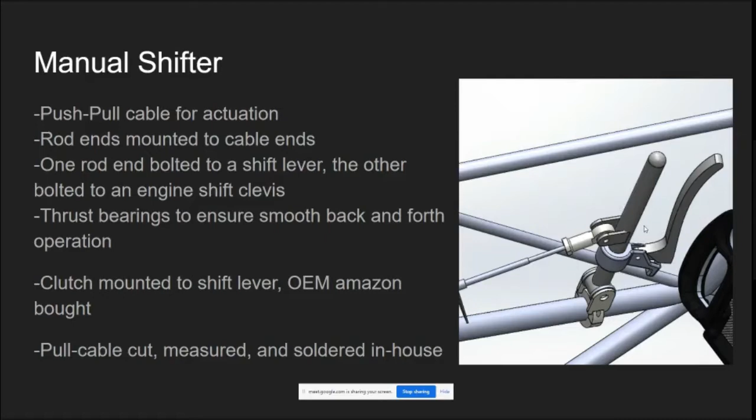This clutch lever was a bolt-on fix from Amazon, for a motorcycle, so it really wasn't a high-cost system itself. However, it was very effective in completing the system and completing its function. All right, next is the pedal box.

I'm going to just touch upon this because I have a capstone from 2018 that is our pedal box that we've grandfathered from 2019 through to 2020. And it's actually a really cool capstone. I encourage you all to read it. I've linked it in the same folder in the member development. I'll show you that later. The actual PDF file is in there. So I highly encourage you to read through it on your own time,

because the process of design is impeccable. It's something not out of just common sense. It's something that they've put thought into quite literally everywhere. So mainly the 3 points I wanted to nail through about the pedal box. It's arguably the most crucial part of this entire control system, because it is the most designed.

And when I say most designed, I mean the most amount of hours of engineering principles, from mechanical advantage all the way up to pedal feel, up to newtons per G of deceleration that you could see from the braking force. Everything from that to the pedal ratio of the throttle and the cam design, which we'll also be going through. I have a list here of documents that we're going to be going through.

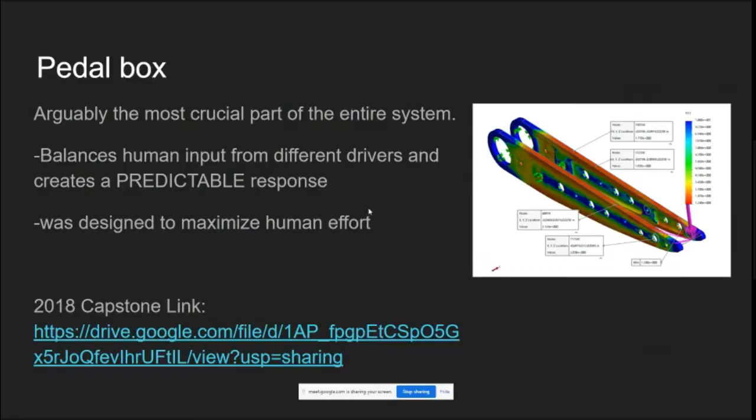Now the pedal faces with side cups, these are actually 3D printed out of a carbon fiber reinforced polymer on a Markforged 3D printer. We'll get more onto that later. It's something that one of our sponsors had done for us. So if you see any of that black material, kind of like the stuff on the RF19 steering wheel, it's a carbon fiber reinforced polymer or reinforced nylon. It's very strong stuff, also very expensive to prototype.

And our sponsor has recently gone out of business. However, we will be printing stuff through the DFZ, Design Fabrication Zone, in the upcoming years for CFRP parts. And those CFRP parts are very versatile, whether you're a CV vehicle or an EV vehicle. These parts need to be prototyped. I'll get onto the accelerator or throttle pedal later, as well as the brake pedal.

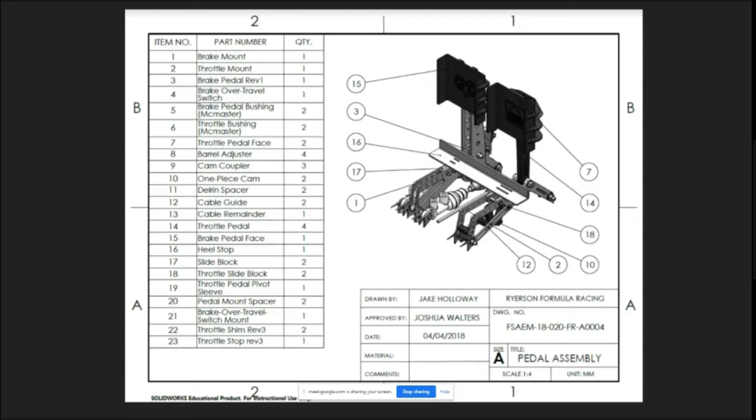But the pedal box was designed to encompass a 4.2 pound weight goal restriction, as well as accommodate the correct pedal throw for the desired newtons per G deceleration, as well as the throttle profiles desired. Next, this is a back view of this.

Now, this is actually something I can touch upon now that you have a picture of it in front of you. If you look right here on the left pedal, I'm not sure if you can see my cursor, but number 23, number 22, that's a throttle stop. Now, they put a throttle stop that would bottom out on the back of the bulkhead, or the anti-intrusion plate, as you would see it.

So on RF19 and RF20, you'll see that that blue cone is glued to the front of that anti-intrusion plate. It's just a small 1/16 inch laser cut steel plate that has been welded to the front of our car, or the front of our bulkhead, and this throttle stop presses on the back of it.

Now, the very unique part about this design is that when you hit the bottom or the throw, or if you hit max throttle on your throttle pedal, max throttle is actually defined by how many shims, or how many inches of travel you have between your pedal face and that anti-intrusion plate in which it hits and bottoms out on.

Now, because the force of your foot on the pedal bottoms out on that face, using the back of the anti-intrusion plate as a structural member to absorb the force of your gas foot, your right foot, you don't need to make a very strong throttle pedal itself. So you'll see that these throttle pedal plates were made originally of aluminum, but we got them reprinted out of CFRP and reinforced with continuous fiber. And we're going to get more onto that later.

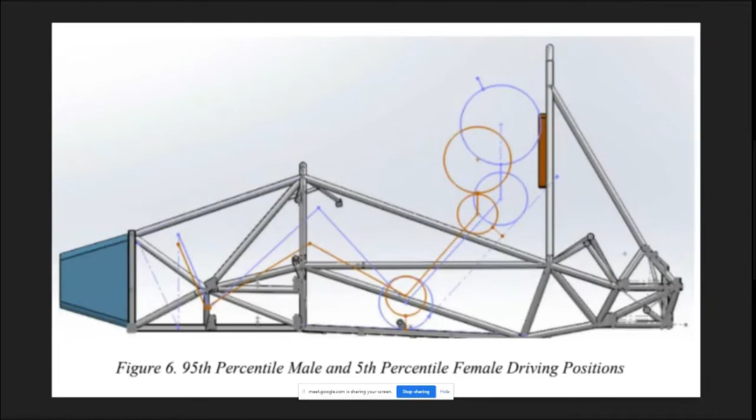Now, this is a picture of RF-18's driving position, where 5th and 95th percentiles were accounted for. Notice that the bottom hip circle, the orange circle indicating the 5th percentile female, would be higher than the 95th percentile. You can actually see there's a little gap right there in the bottom. So the whole point of showing you this picture is that they've put a foam pad underneath the 5th percentile driver to raise them up so that they have a similar eye line to the 95th percentile male. Just a point to nail through.

Now, I hope you guys can see this adequately, and I hope you guys aren't looking through a phone screen, because I can see it through my phone screen. It's not looking too great.

from the point of, you might be able to see it, a small blue line here indicating the driver's femur, another small blue line indicating the driver's tibia and fibula angle, as well as another hidden blue line, which is their ankle angle. The ankle angle would be 90 degrees constrained, so that you're not holding your foot at a 70-degree angle with respect to your tibia and fibula, which would be quite uncomfortable for an endurance race, let alone small operations of the car.

But one thing that you should nail through is that there's a small distance somewhere hidden in here. It's 36.5 inches from the tip of the ankle to the H point. Now, whoever is doing ergo next year, most likely Kyle or Josh.

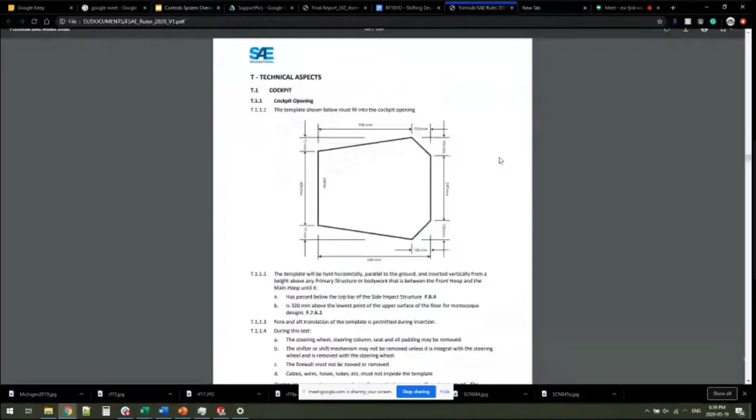And if it hits anything, you do not pass tech. They simply say your template does not fit, there's interferences, it's just not rule compliant. And this is a rule in FSAE competition. Actually, I'll show it to you right here. This is the technical aspect of the cockpit opening template, as well as the pedal template, which is the internal cross-section template.

Now, let's see if I can get it back. This goes from right below the steering column to 100 millimeters before the pedal faces. And again, if these cockpit templates go through the cockpit at any point and hit something other than the steering column or steering quick connect, it does not pass tech inspection.

It will not. So that being said, this is one of the biggest things other than the driver position sketch that dictates the shape and form of the chassis, as well as the shape and form of the cockpit opening, because every year it's a very tight squeeze for this template.

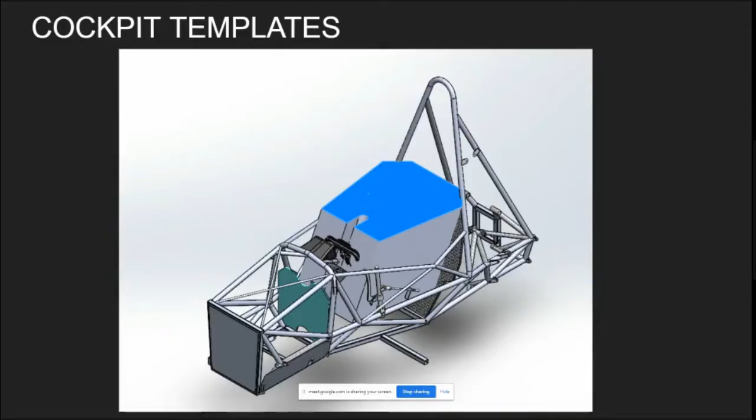I'm going to go over the support pictures now. Some of these are cool pictures I've found. I just dragged them off my gallery, and some of them are actually things that we've taken pictures of that I wanted to talk about. So we're going to go straight to this.

That's actually a few sim wheels that we've gone through. Really cool stuff that I found online just for ergo purposes. That was another. Let's see if I can zoom into that. That was a cool little shifter paddle design that was single shear from Modena, Italy, as well as a Lifeline.

Lifeline is a brand of quick connects with an internal LEMO connector, meaning you don't have any wire coming out of the wheel for electronics on the steering wheel. It's all through the quick connect, which we're going to get into when we go through the steering wheel design, because we made our budget quick connect with our budget LEMO connector. It was actually a LEMO connector, but we just didn't pay $400 for the quick connect.

Yeah, it's kind of funny actually.

Now this is something I wanted to get into. Now this steering wheel design, it's great. However, not everyone that trains on this car or drives a car would know or have to use all these buttons. It's something I want to mention as well as touch upon is that there's no padding on these grips.

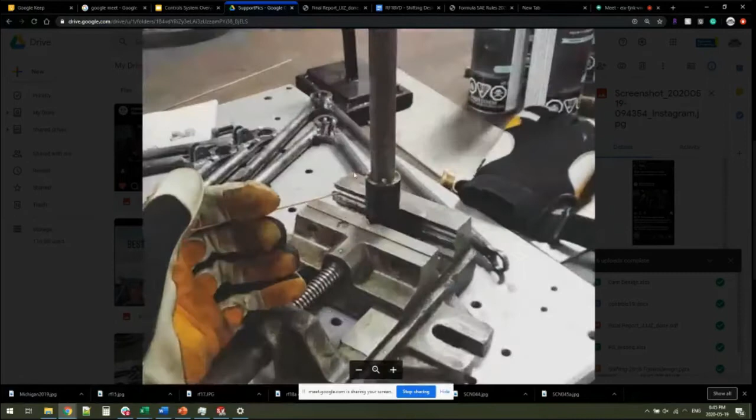Sorry. This is actually something I want to zoom in on. This year and every year, we have to re-weld the steering column. So I wonder if I can get back onto it over here. There's a steering column that passes right through this cockpit template right here. And the cockpit template does maneuver around it as per rules. However, this spline that connects to our steering rack has to be welded every year. So just a note, that's a manufacturing thing that it has to be welded every year.

This is a sample product of what printing a paddle shifter looks like. Something I wanted to talk about was the shape of that box meant for a square 10 by 20 millimeter by 2 millimeter neodymium magnet. Now, when you 3D print something, you should also do a test print of some sort, internal or external, to figure out the sizing or tolerance.

Just because you print something with a 10 by 20 millimeter box on the inside, kind of like I did here on this paddle shifter that I printed at home, you'll expect 10 by 20 millimeters to come out of that print. But that's not always the case. Sometimes the filament swells and you need to make that box in CAD 10.5 by 20.5 millimeters for it to actually come out as 10 millimeters by 20 millimeters, as well as print bed direction.

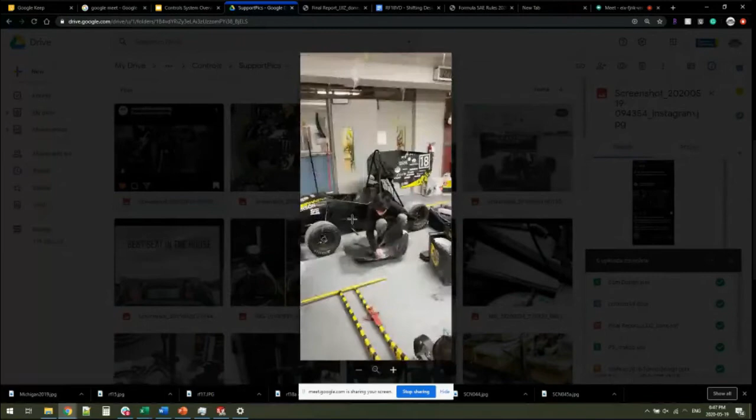Just a quick note. This is a picture of the seat within RF20. I don't think there's anything more I wanted to say about that. That was the seat finished. That's Kyle sanding the seat. That's the seat when it was trimmed. Now, you can see from a couple of pictures ago that there's a nice black grommeting around this seat.

That's actually rule compliant. You need to shield or grommet any sharp edges from wires, as well as a safety thing. You don't want to be fraying your wiring harness that your electrical lead has put so much work into. Fraying those like 20 wires or 46 wires that are going through, or the 7 that are coming through the cockpit right on the right side of the driver.

You don't want to be fraying those, as well as you don't want to be shifting and using this side of the seat as a knife onto that wiring harness or anything else, like a push-pull cable of any sort.

So it should be said that there's also grommeting on the inside for belts. Now, something that they inspect at competition every year is belts. If they're frayed at all or show any signs of wear, cracking, melting... we actually melted RF18's on the exhaust. I remember that. We couldn't use that harness anymore other than in testing because it was melted.

Even though it was a strand of it, an extra part of the harness that was never going to be put under tension if used correctly, they said no. You can't use it. So be very careful about your seat actually chewing away at your belts. It's very common and easily preventable.

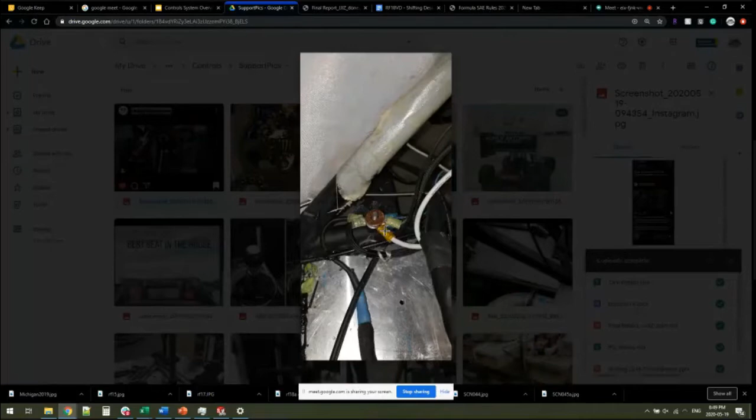And these are the pedal cups that I was speaking about. Okay, so I'm not sure why Google's not letting me zoom into it very much. Hopefully you can see it. These are pedal cups, and we have more pictures of them later, that bolt in the side of each of these throttle and brake mount plates. These bolts need to be redesigned because they're extremely hard to service.

But it accomplishes the end goal of keeping your driver's heels from bouncing left or right in a high lateral G situation, or a high lateral G situation with a bump vertically. As well as this white, I think it wasn't nylon, I think it was Delrin. I forget which material that was. Amar will know it because he used it for his wing layups. I believe it was nylon.

Anyway, my point was we riveted this nylon sheet onto the gas pedal because early last year we purchased a go-kart, and we thought it was a really cool idea. This go-kart had a roller on its bar gas pedal. It was like a horizontal bar gas pedal with a roller, so that your foot kind of rolled on the gas pedal itself. It didn't have to press on a lever. It kind of rolled on a tube that was just limply held on. It was a really cool idea, but

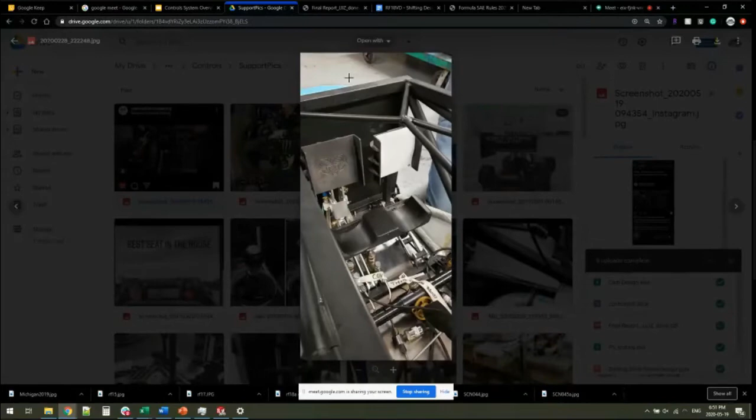we wanted to adapt that concept to this throttle pedal by making the throttle pedal constrained left and right, so that your foot is constrained by these little plastic nubs that we 3D printed into the pedal face, but is not constrained in the fore and aft direction, where it could slip on this surface quite nicely, such that it provided ease of feathering techniques for throttle control.

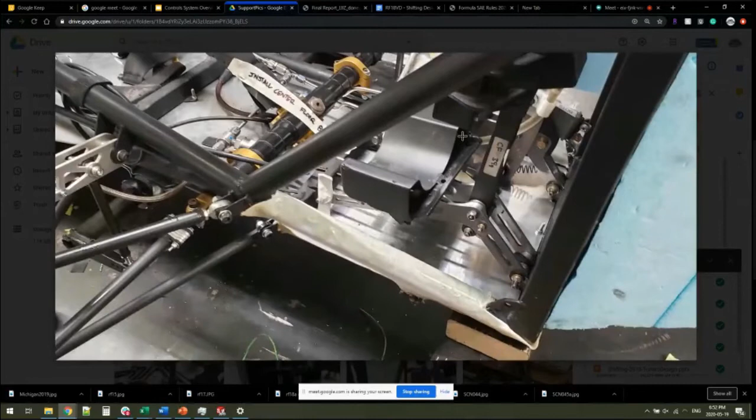This is a side view of the pedal cups. As you can see, this is one of the throttle pedals that we swapped out from that two-plate design. This is a carbon fiber, 39-gram filled throttle pedal, and that's the throttle pedal stop up there. You can't see it, but this blue cone is glued onto an anti-intrusion plate. This would hit the back side of that anti-intrusion plate. And that is a bad idea. Next.

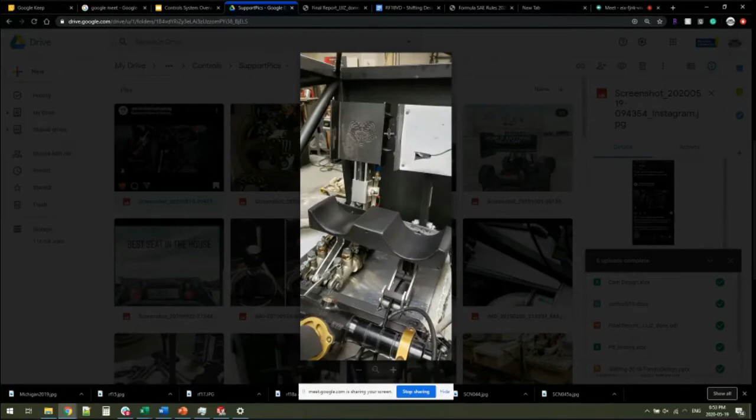This is actually one of the things that we've come across with respect to cockpit, but still within controls, arguably, is the shielding of the powertrain from the driver. If you're doing anything driver controls related, you may be tasked with preventing fuel oversplash into the driver cockpit. This was one of the ideas we had to implement to shield that. That's a better look at the flying electrical lead over our pedal box.

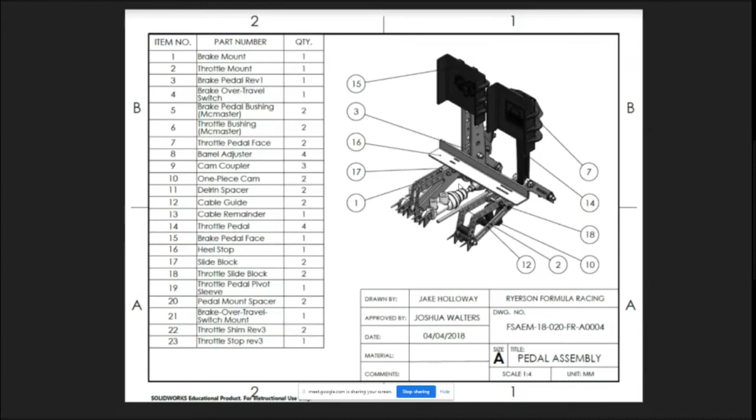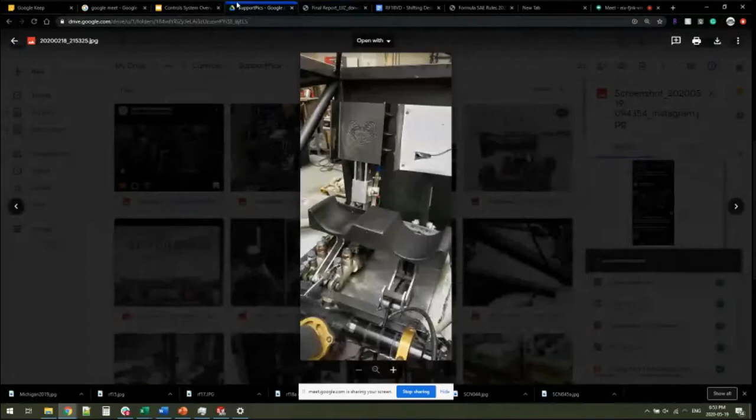So the pedal box that I showed you, this one over here, has a dual plate design. Let's see if I can get a better view of this. If you can see it, there are small holes right here, maybe about 8 of them, to move the pedal cups or the heel stop fore and aft. Now, we've never moved the pedal cups fore and aft, because the bolt is so hard to get, so we actually just used the furthest ones and we extended the pedal cups forward.

We actually ended up putting this one-sided adhesive neoprene sheet down there, but that fell off, so we ended up putting that tack strip. You can find those little anti-slip strips in stairwells on the tips of stairs. They're like little scratchy patches. Scratchy patches, I'm going to call them that. We ended up putting a couple of strips of them there, and it actually anchored the driver's ankle.

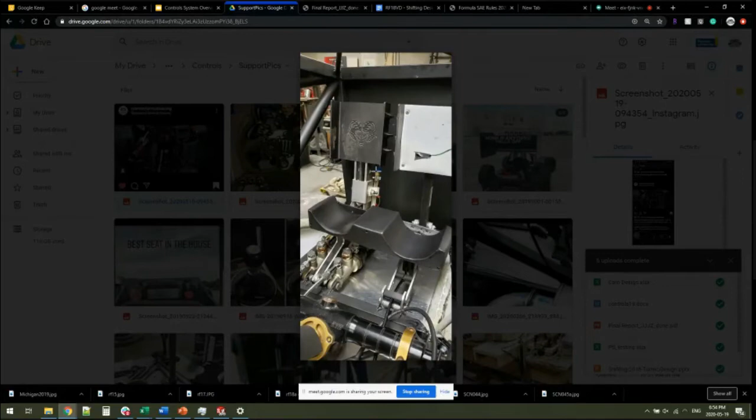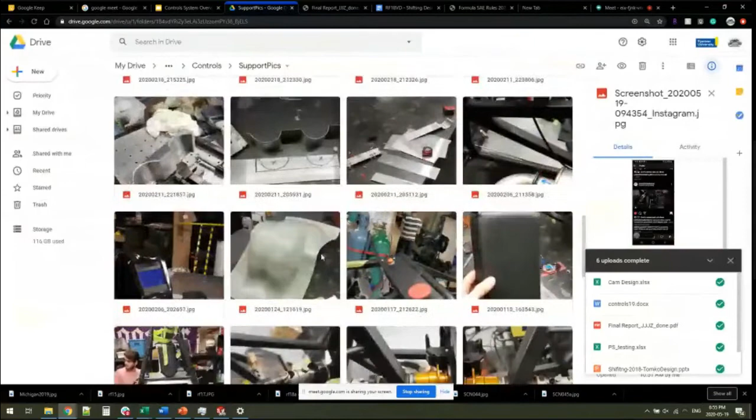That's Jasmine. That's a better look at Jasmine. This is the pedal cups that were unpainted. Very hard to make these. I had to weld the sheet metal. I wish you could see it. You can see it in the corner there. I had to weld the sheet metal and then take a grinder to it. So they're lightweight, but they're really hard to make. Just a point of view. That was the sheet metal heel cups.

Cool. That's a seat mold off of the seat mold, a male-female. I'll get back onto that. This is RF20's dash. You've probably already seen this. That is a headrest that has been wrapped.

Also, keep in mind, in competition every year, you need proof that your headrest foam is spec 45.2 at competition, as well as, and this headrest does not have it, and we should have it, a hole punch in the side so that they can verify that this foam is the same spec 45.2 foam that you have purchased with purchase order and/or shipping label.

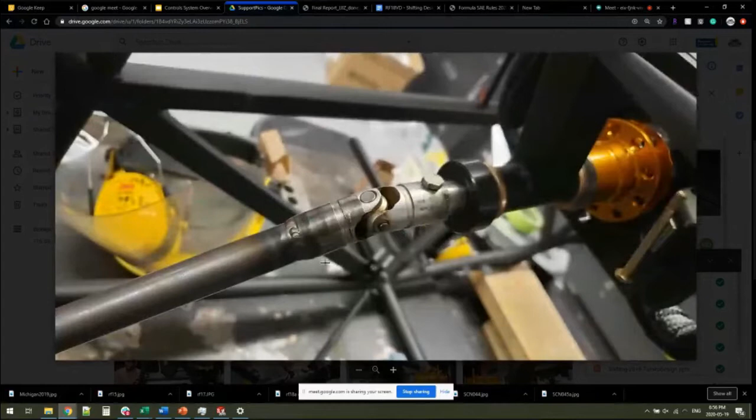Cool. This is something that I wanted to look into. Now, you see this U-joint that we have right here. On RF19, it was bolted here as well as bolted here. But some corners were cut, and I wanted to make sure that there was as little play as possible between this shaft here and this shaft here, the upper and lower steering columns, by welding the second side, or the pedal side, of the U-joint to the lower steering column.

And the top one is still bolt-on so that we can service this bushing and thrust bearing assembly. The bushing and thrust bearing assembly is something that is quite unique, and I have Ariel to thank for it. Within this system is a spline quick connect welded to a 3/4 inch shaft, which I think you can see right here. This is 3/4 inch. Drilled to a 1/4 inch sleeved hole, and in that you can see many things are happening here and here.

This is a washer right here. This first plate here is a washer that has been welded to the 3/4 inch tube that this quick connect butts up against. But this washer is actually used as a clamping surface between this shaft collar over here and this washer to fully constrain this shaft concentrically to this steering column.

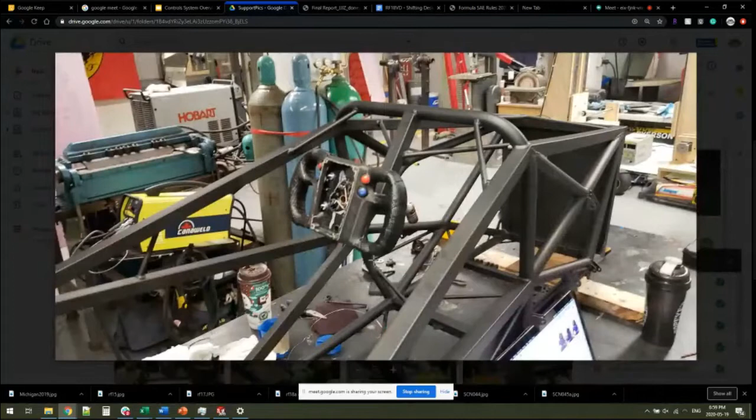This is the cockpit for RF20. Now, I want you to take note of how the steering column is a single square tube suspended off of the front roll hoop. We've recently switched to a single tube to improve knee clearance when in egress, as well as it was overbuilt to begin with. But we still have these struts right here, these steering column supports, so that this tube does not deflect while steering. Cool.

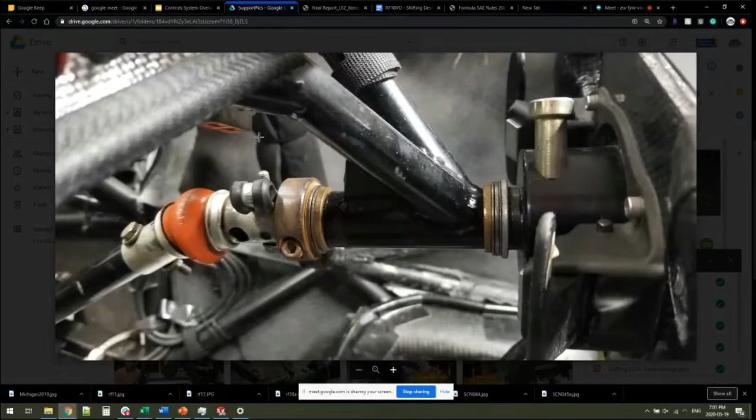This is from RF19. This shows you the exact same thing that we used in RF20. It actually looks like the exact same picture, but it isn't. It's a different steering column support. Same washer design with thrust bearings and oilite bushings. It worked really well for us.

You can see there's a hole right here, right before the U joint. This is actually when we had that LEMO connector fed through the steering column and wires popped out right here. This allowed these electronics not to be wired with an external wire throughout the steering wheel, but through the column itself, which was pneumatic shifting.

All right, now this is a picture of Amar in the sim rig. I believe this is for RF20, his driving position. It might be RF19 because it looks fairly upright. Now, this is a great example of what I was saying before. Oh, yes, thank you, Kyle. This was RF20. Amar is not a very big man, sideways or bulk. He's a very lean man. And so having him fit into this ergo rig, you can see his knees are almost touching the MDF of the ergo rig. And it is a phenomenal driving position for Amar.

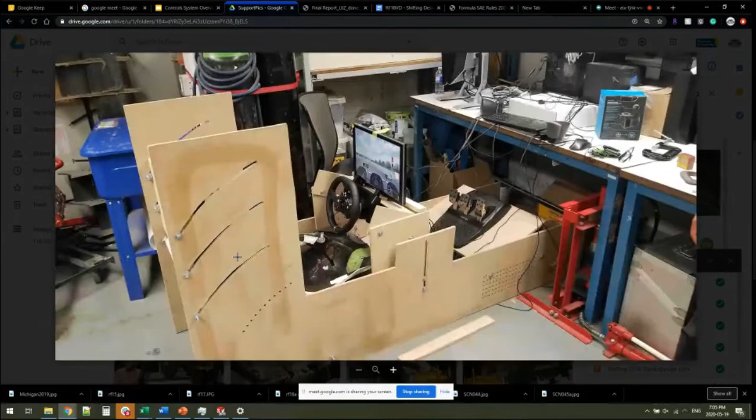Okay, let's keep going. This was a side view of this sim rig. And we actually did align the pedals to be at the same height and position that the pedal box would be at in RF20 as well. Okay, cool. On to some other things.

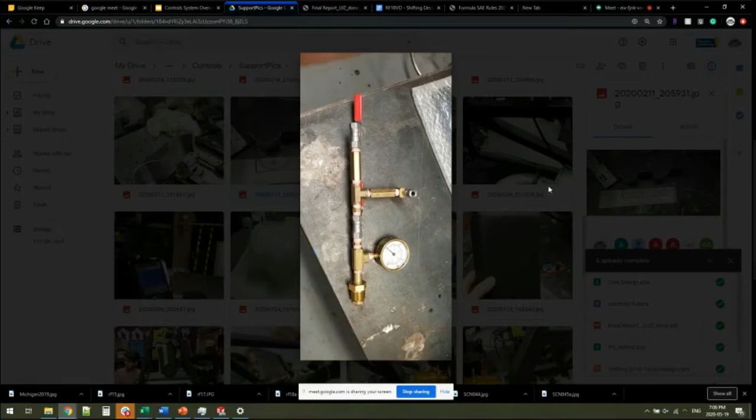This is a pneumatic filling rig for plugging a paintball tank into an H tank or a T tank of nitrogen or compressed air. This side right here, where the nozzle is, connects to an H tank or a T tank, and this side right here connects to a paintball tank. There's two valves here, you can see the little red levers. It basically takes the H tank or T tank pressure and equalizes it through this little channel to a paintball tank for a pneumatic shifting rig. We'll get more onto that later.

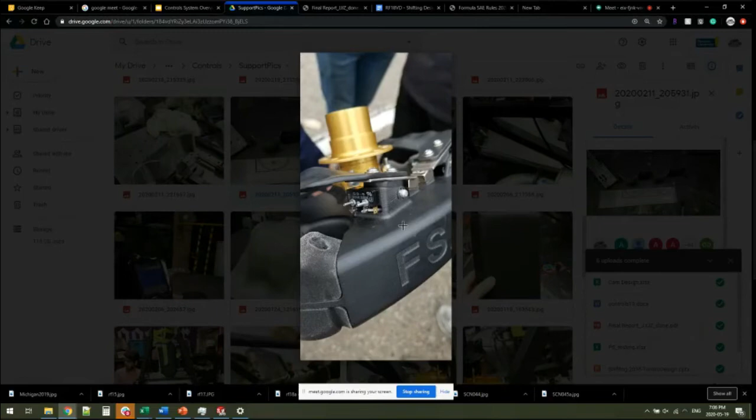Now, this is a picture I took of the Ohio State's steering wheel. When they did this design for their paddle shifters, which is really cool, there's a micro switch right there and two little magnets that are naturally connected that are broken once you push on these paddles. And it's a double shear mechanism. However, the contacts are exposed. And that's something that I wanted to show because you don't want mis-shifts or exposed electrical contacts on any part of your powertrain or anything that controls your powertrain within your system.

In my opinion, it should be against the rules. However, it is not. It is a very bad practice, but it is still being practiced today. It might have been coated with an acrylic nail polish or some sort of coating. However, I could not see from this picture, or from handling it with my hands, that was the case. So very important to note. We'll get onto this more when we compare RF18 and RF19 steering wheels. Cool. That was Ohio State's steering wheel, or sorry, car.

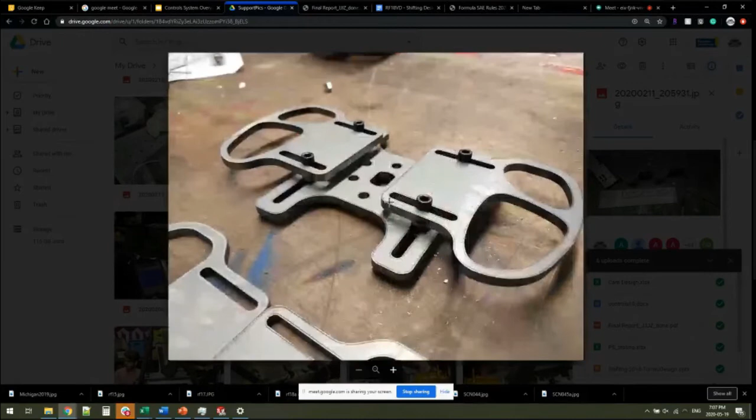Now, what I want to show you was this. This is one of the stepping stones of the design from the RF18 to RF19 steering wheel. When we had the RF18 steering wheel, which I will show you later, we found it was good for some drivers but not others. Some people complained that their thumbs were too far forward and they were steering with their thumbs, and they had fatigue on their hands because the grips were plastic, thick and hard to grip. It was like working out with a thick grip on a dumbbell every time you drove the car. And we also played around, you can see this H plate on the back, with the height of the steering wheel with respect to the axis of rotation.

That didn't yield many fruitful results. We could have probably done without the vertical aspect of this testing of the steering wheel. However, we still did try it, and we proved that it was a very weird driving style to be swinging the wheel left and right, or kind of like in a crescent moon action about the rotating axis, above or below the rotating axis. It was a very unnatural feel.

But because we had these four slits in the top plates, we're actually able to rotate or angle these grips inward or outward, kind of like a negative and positive camber, like a V or an A, right? We tested that, and I'll get more onto what our findings were later when we go through the RF19 design.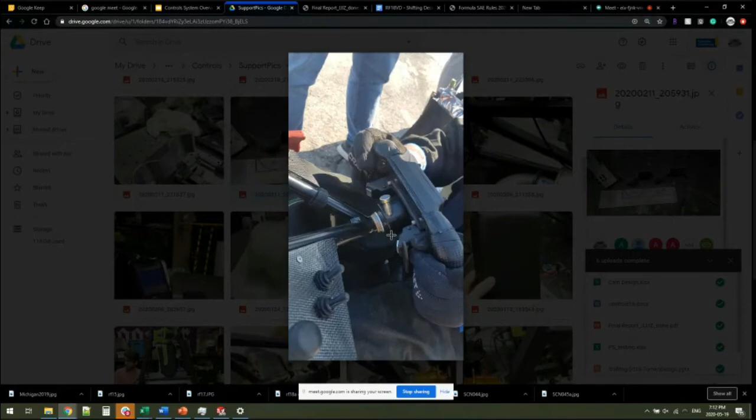This is a better closer up picture. You can see a thrust bearing assembly. It should be noted that this thrust bearing assembly should be oiled and lubricated with Mobil 1 synthetic grease prior to assembly, because it's exposed to the elements. It's stainless, but it will still rust given time. That is a better picture of a work in progress.

This was the RF19. Okay, this is the thrust bearing assembly for the shifter. Okay, so this is the shaft collar in RF19. You can see there's this tiny little nylon infused Delrin bushing that goes onto the inside of this shifter tube. And on the left and right of this shifter tube, and I can't zoom into it, are thrust bearing assemblies.

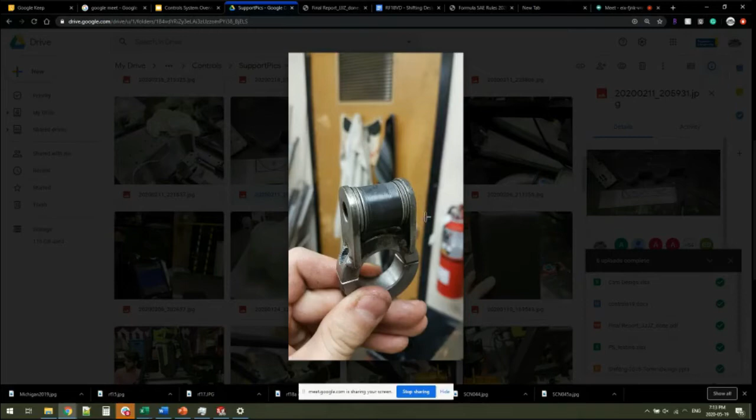Now, this is very useful for shifter binding. When I clamp this with a bolt, you'd think that these tabs, they're like 1/8 inch steel, wouldn't deflect, but they actually do deflect minutely, and they do put pressure on these thrust bearings. When we had bushings there, we would find that the shifter would jam if we tightened this bolt too much. Now we can lube these two thrust bearings, and they will roll effortlessly, almost as if there's no clamp force there. They take the clamp force as a roller bearing force because they are thrust bearings.

Okay, this is something I wanted to show everyone as well. This goes upon U Victoria's wheel of exposing shift or micro switch contacts for shifters. What we had done between RF18 and RF19 was take RF18's exposed shift contacts and put them within the wheel. Now, yes, you have to glue micro switches onto a 3D printed paddle assembly, as you see here.

However, these shift switches are now protected a lot more from rain than they are in other designs, such as U Victoria's and RF-18s. We didn't find any missed shifts because it was doused with water. However, it's not good for the longevity of the component, as well as the longevity of any electrical component, to be exposed to such elements.

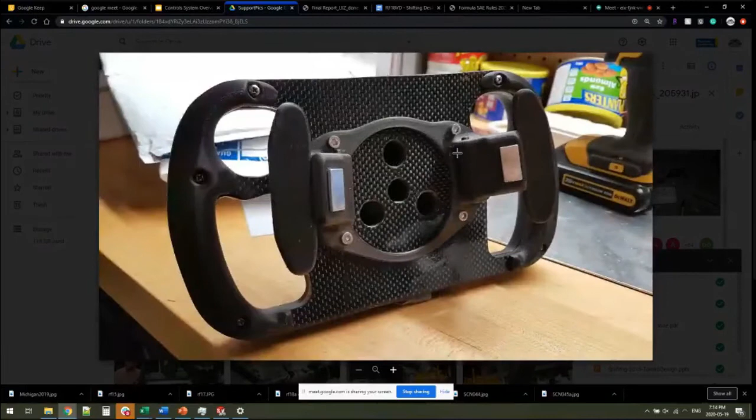That's a pretty picture of the wheel. This is the shifter paddles mounted to the back of the steering wheel. This is where the neodymium 20 by 10 millimeter by 2 millimeter magnets sat on the inside here, as well as that 3D printed paddle that I showed you a picture of, and I rambled on about tolerancing before. The other magnet sits, you can't see it, it's hidden here, and because they're such strong magnets, they can actually act through the plastic, which is quite nice.

Now, the reason for making these paddle shifters magnetic is not because, oh, they're pretty and they have a nice feel to them and I want to be an F1 engineer. No, it's because they actually give a tactile feedback to a completed shift. If you've ever raced on a sim rig or a sim wheel which has quiet shifters, or does not have clicky shifters, and you race with headphones on, you'll actually notice that you end up having to shift harder just so you can feel the paddle bottom out, because you lose the sense of hearing the shift when an engine is screaming at 11,000 RPM behind you.

So that being the determining factor, I want to give this steering wheel a tactile feedback, and quite a powerful tactile feedback. And as you can see, you can actually add more magnets onto this to adjust the tactile feedback that you get from these paddle shifters, right? You can actually add more magnets onto the back of the paddles as well to make it clickier, so that you know when you've completed a paddle shift. This has given really good results in the past.

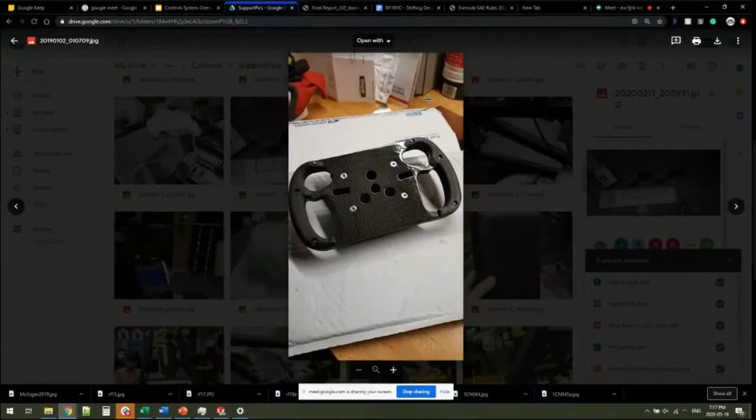As well as stainless hardware. These are 4-40 screws. I'll get back to this later when we go through the CAD design of this, shortly. But you want these things to look nice for design judges. So we made these stainless hardware go into aluminum threaded inserts that were glued into this carbon plate. I'll get back to that. It's the pretty wheel. That was the aluminum inserts right here that those paddle shifters screw into, as well as little slots for the micro switches to pop through into the wheel, so they can be soldered in the wheel and not externally.

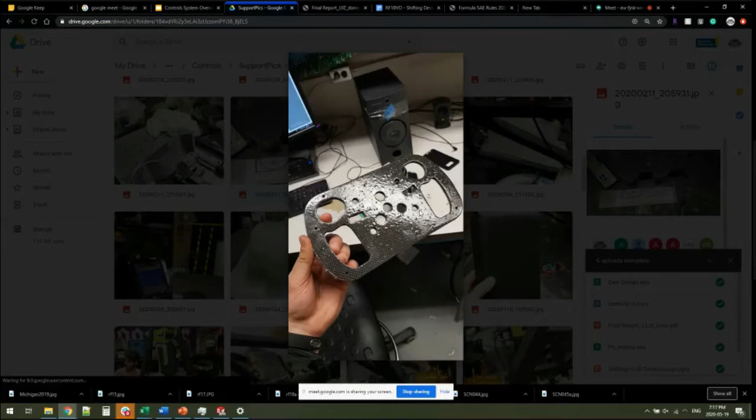This is what happens when you get bubbly clear coat. Okay, so this is a story. When we were machining this in house, the CNC broke right there. You can see where it plunged, and it broke. The CNC servo controller motor actually fried, and I actually had to do the rest of this by hand. So because I had a one-to-one drawing ready, I just glued it over and dremeled the rest out. No, this was where it broke. But we got this actually water jetted by another sponsor, so we sent that out and we had this done for us too.

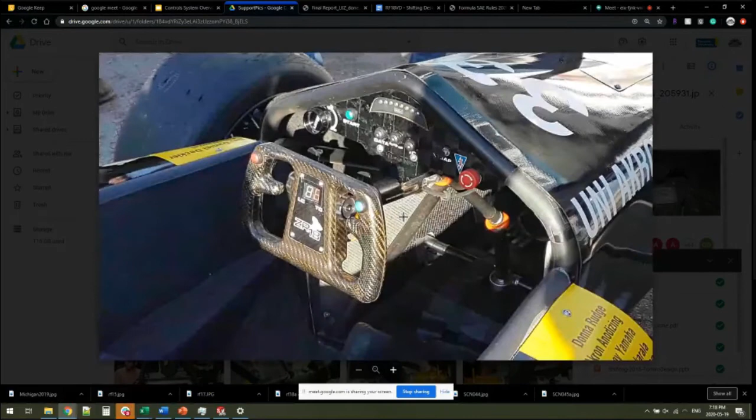These tact switches that they've glued on don't have back switches, so they're actually physically glued onto the wheel, which is good. You know, it works, it's reliable. But if these tact switches break, you can't swap them out easily.

We'll get more into that back on the RF19 CAD. I'm running low on time. I got a lot to go through, so I'm gonna just zoom through these.

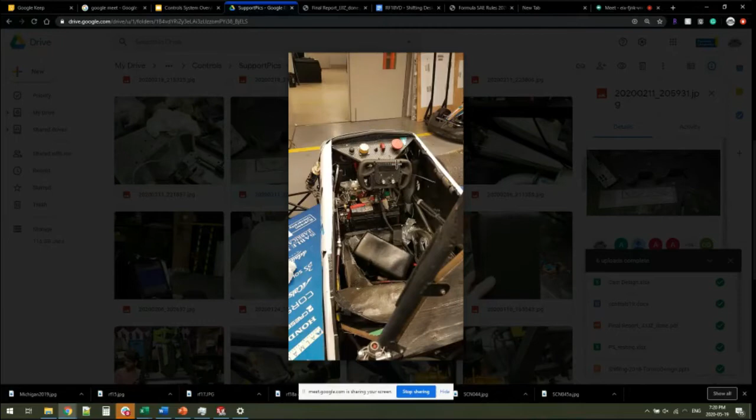This is RF18's cockpit. We had two supports from the corners of the front roll hoop down to the main shaft support for the steering wheel. That was our dash. We had all of our dash electronics, which are RF19 dash electronics, in RF18's steering wheel. Yeah, that was not good. This is really cool because this was a 3D printed tube jig for determining steering column angle. This was done by a new member at the time.

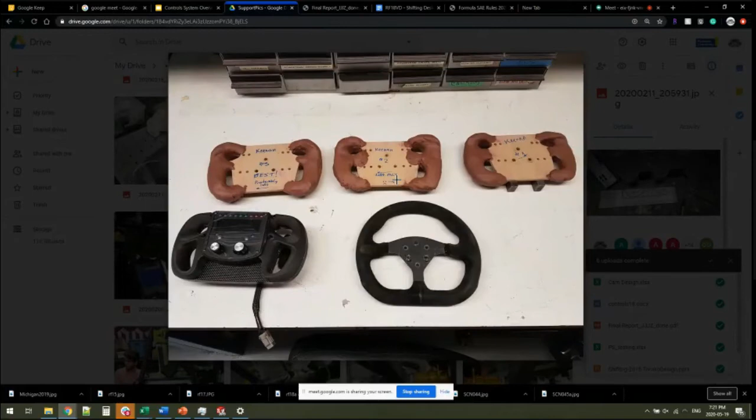This is when we had Keenan come in and mold steering wheel grips, and we tried to 3D scan these, and we quickly found out that these grips that our ex-Formula Ford driver had molded were fantastic for Keenan, and Keenan loved them. He was so excited to see these go into production.

Except the second Ariel or Amar or Daniel or Christian picked these up, they said, "Oh, there's a really high point here. My hand doesn't fit this quite nicely." So I actually found out that this wheel on the bottom right here, the Momo wheel as we call it, gave really good results on all the drivers.

Even Keenan liked it, because it had no hard points or pressure points to it, because this wheel, above all the others, had padding on it. And so padding, simply put, takes all those pressure points off your hand. So what I did in RF19's wheel was actually, and I'll get back to this.

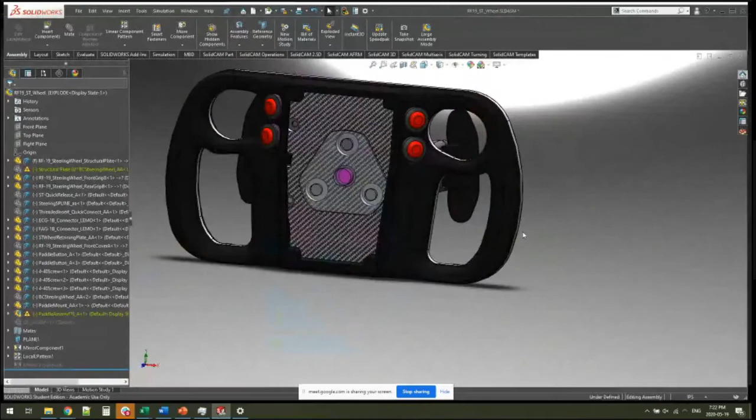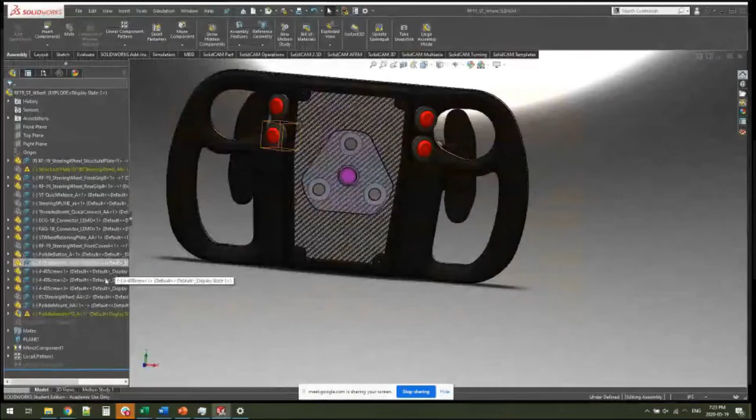And because this Momo wheel had such good reviews and had such freedom in these thumb holes for all your hands, we actually took that into account. If you can see this, I overlaid RF19's wheel and RF18's wheel in one assembly, so that you could see the difference in the thumb holes as well as the 3-finger holes.

I curved it up on the edge right here so that you could fit your index finger and your ring finger through these holes and make a full grip on this steering wheel. Let's see. I'm going to zoom through these.

UBC. Okay, so these guys had a steering wheel covering their dash module, which was a Motec dash module, and they had to get past the rule that no steering wheel can be concave or convex of any sort. So if you've ever seen an H-type steering wheel, a Red Bull F1 steering wheel.

If you look at a Red Bull F1 steering wheel, we're not allowed to do stuff like this, where our steering wheel has a concave top or bottom. They're called H-type steering wheels. We're not allowed to do that because they're considered to be unsafe in Formula SAE. However,

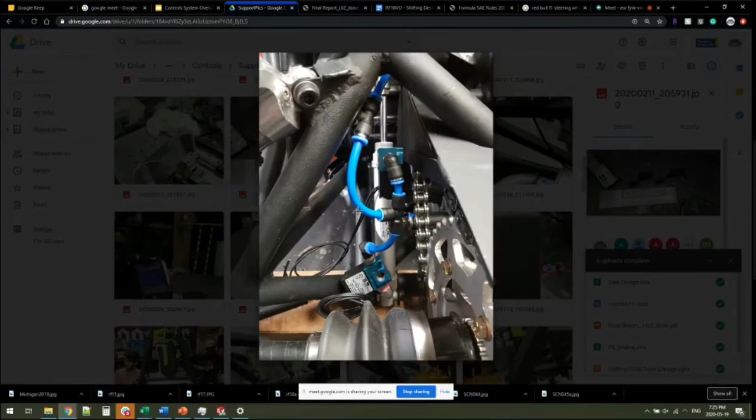That's more of our pedal box. That was our pneumatic rig. Very close to the chain. Wouldn't do that again. Put too many bends in these blue tubes where there should have been fittings. Every fitting leaked, by the way. So the more fittings you have, it's kind of like the more bars you have in a 4-bar linkage, the more compliance it'll have.

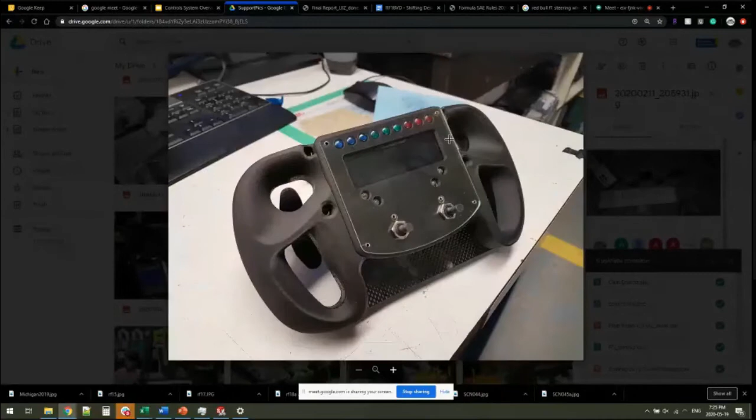Not too bad. But you can notice that if you put your hand over the screen over this box right here, I'll keep on highlighting that, you can notice that this thumb hole and this 3-finger hole are almost directly over each other. Maybe 1 or 2 degree offset, so it looks like a negative camber, you know? Sorry, positive. No, yeah, positive camber, maybe.

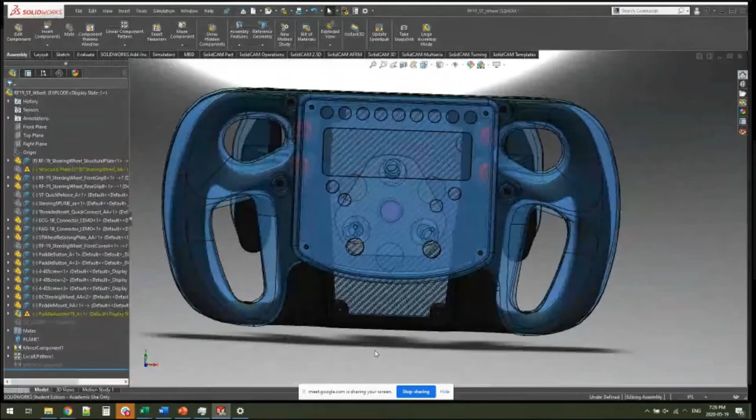Okay, I'll get to this because what I wanted to go upon was the design of the steering wheel. I'm going to hide this component. When we did this wheel, we designed the structural plate first. So I'm actually going to open this part and show you the sketch.

Right here, we have a bunch of holes. It looks like a complex design. These 3 holes right here are for the quick connect. This hole right here was put in line for the little switch that was going to pass through it, little connector for the electronics. These little cutouts are for the paddle switches.

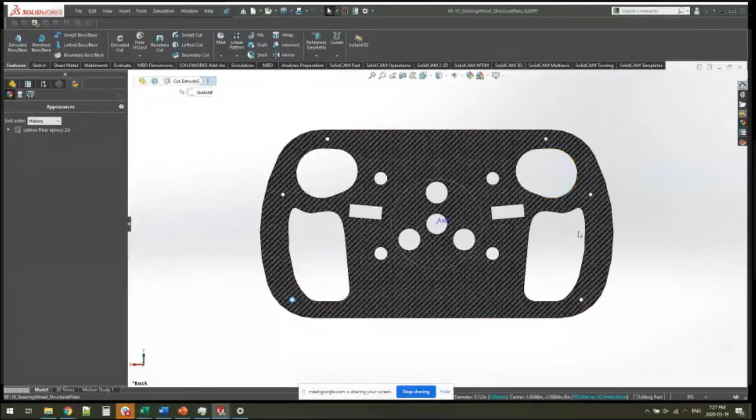These outer 6 holes are for the front grip to be bolted through the wheel to the rear grip, which is, I thought, pretty cool because you could embed nuts in the print. Awesome. But something I wanted to show you was the actual shape of the steering wheel itself. I didn't draw out the wheel in a 3-dimensional thing. I did a 2-dimensional sketch first.

So the actual outer dimensions of the wheel were such that it could fit on the bed of a Markforged 3D printer. That was the literal constraint of this steering wheel. So 5.20 and 9.65 inches fits perfectly onto a Markforged Onyx X 3D printer that prints carbon fiber reinforced polymer.

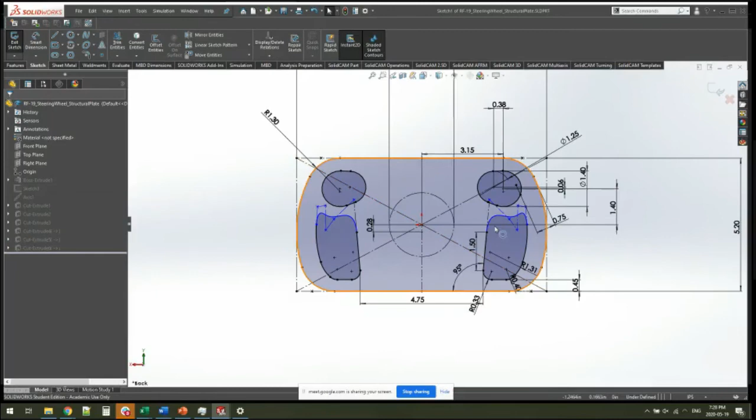As well, most of these features are mirrored left to right, so if you pay attention to the dimensions here and here, you can see that I used a constant radius on the outside, a bigger thumb hole with respect to RF18, as well as I actually printed this out and CNC'd a mock plate with Play-Doh on it to see how realistic this design was prior to actually sending it off to print.

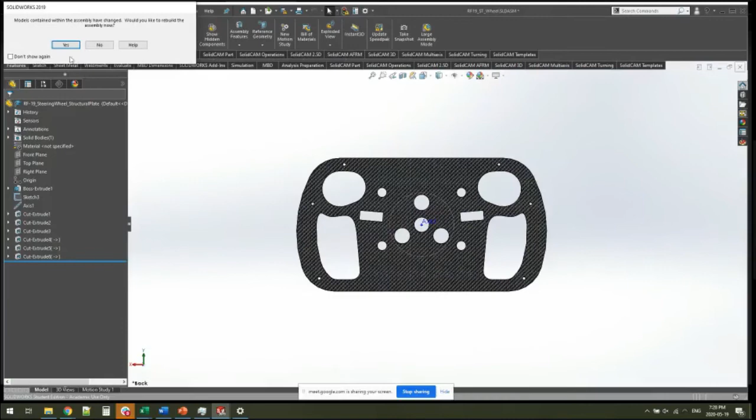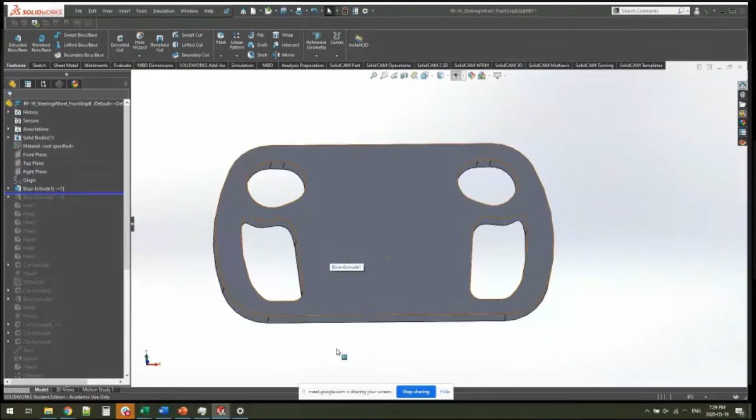Now, once we finished the 2-dimensional design of this plate, we designed the front grip and the rear grip. The front grip being this thing. I'm going to open it. It won't take long. So the front grip is this thing. And I'll show you exactly in 30 seconds how we designed it. Cool. So it all started with this. It's the same exact sketch as the structural plate.

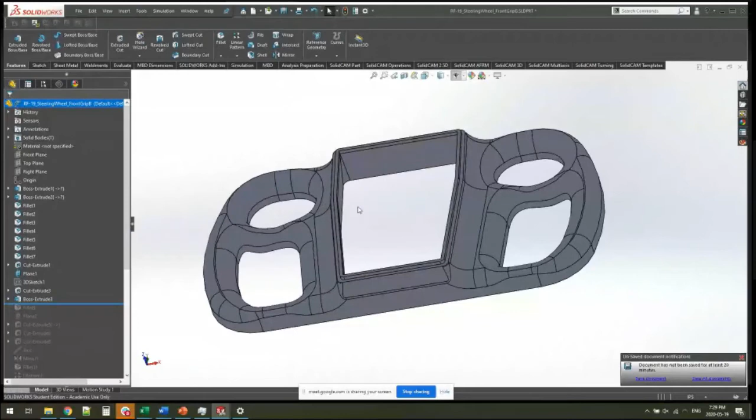And then we made a little box extrude for the button box, right? Little face. Then we put a bunch of fillets on it, right? And then after the fillets, we cut out the box for a lid. Then after cutting out the lid, we added the first of the paddle switches.

Ariel actually came to me one day and he was like, if you're going to be doing a steering wheel, I really don't like paddle shifters. I really like button shifters, because what he had trained on was his Logitech Driving Force wheel, which had button shifters on it at the time, not paddle shifters. And by all means, he was a great driver.

So I was like, you know what? This needs to be done. If these switches need to be added or wired in parallel to the paddle shifters in the back, so be it. It needs to be a design that works for all drivers.

So that being said, we put in 2 switches for paddle shifters, as well as another couple switches for a launch button, and it was going to be a push to talk, but that was actually just a button that was going to be repurposed for later development purposes. And then we added little screw holes so that we could screw in a cover. And that was the front grip. Now, if I take a wireframe view of this, I want to show you guys something.

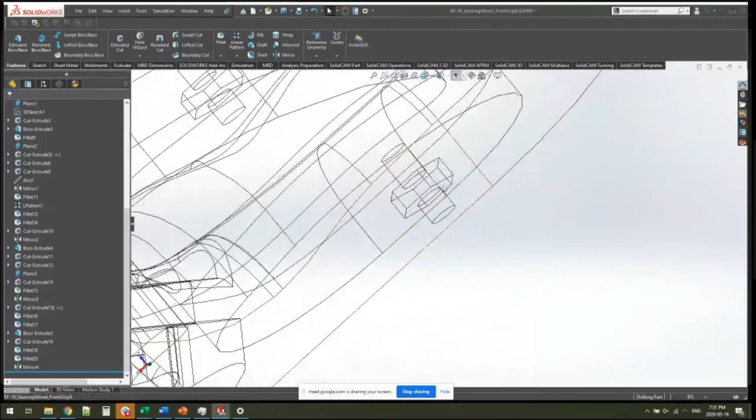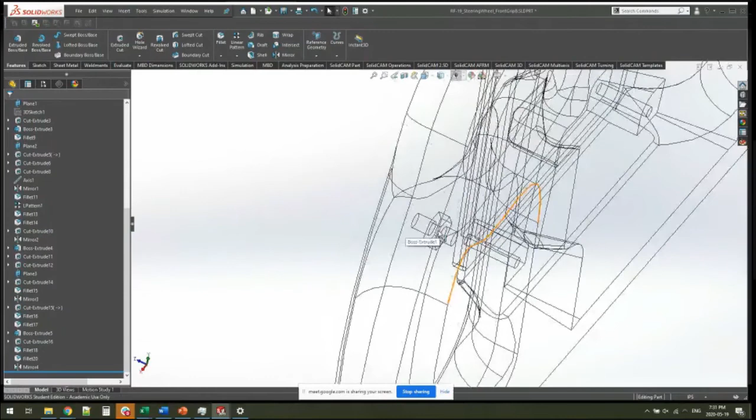In these holes in the back, there is actually a little cavity here that we printed a void for a hex nut. And Mikhail, who was our 3D printer sponsor at the time, said that he can pause the print, because it prints up from the bed from this back face to this front face. He can pause the print at the top of the hex, rip out the material, and put in a nut, so that he can print over a nut and actually embed the nut into the print itself.

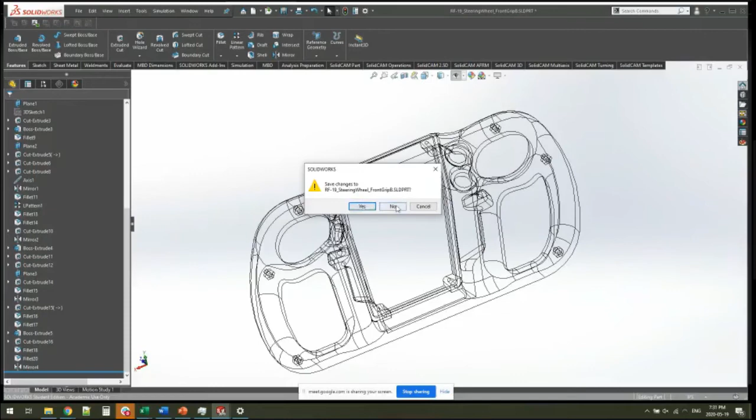And I thought that was amazing because he supplied the nuts, and all we had to do was buy the stainless hardware to clamp this side of the grip through the structural plate to the back plate using none other than 4-40 screws. And these screws, once you wrapped these grips, were hidden, and they still are, because you wrapped these grips with like a grip tape of some sort.

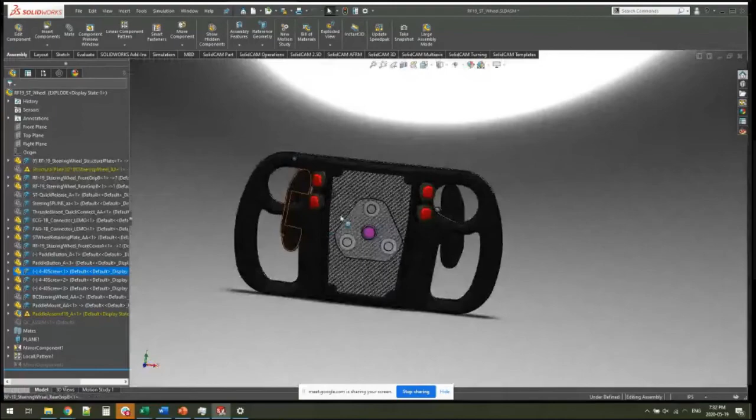And then after that, you put all these switches in. These actually had little nuts so that, God forbid if these switches broke, they could be swapped. So inside the wheel, you have all these electrical contacts, shielded by this. Maybe I can find it. No, that's the wheel. There's a cover here, a front cover. Shielded by that front cover, which is RF18's or RF19's wheel.

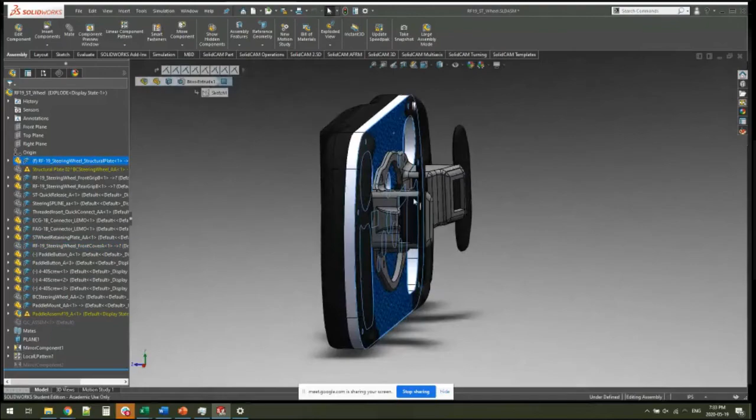RF19's and RF18's paddles were iterated once in RF18, as well as grandfathered the paddle distance from the back of the wheel to the tip of the paddle shifter, as well as the diameter from this center point to this center point. And it was denoted in a controls binder. Okay, that's the steering wheel.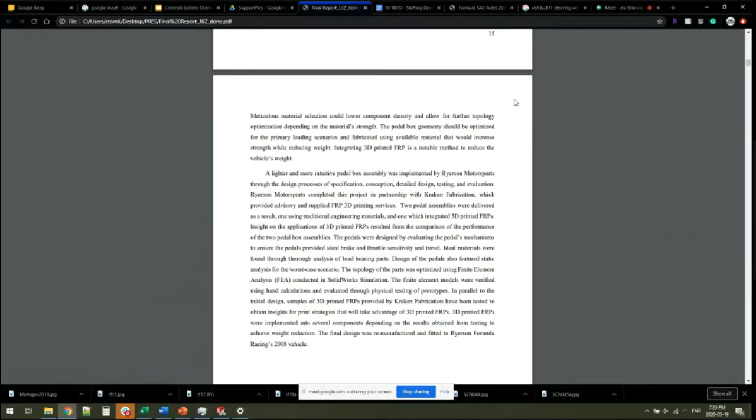They fully designed their pedal box with a bounding box of defined constraints as well as operational constraints, using Optimum Lap simulations, targeted force in loading scenarios. They wanted to replicate RF17's performance and improve it, because pedal feel was a very iterative process, to say the least, and it still is, because when these guys designed their pedal box, they actually did a full cam design as well.

Now, I'm not sure if I had a picture of this in my support pictures, but there is a small cam. I can actually show it to you in here. Right here, you can see there's a little horseshoe shaped thing. That's actually the throttle cam. So when this throttle pedal is pushed, this point right here, which is the end lever of the throttle pedal, pushes this cam so that the cam rotates.

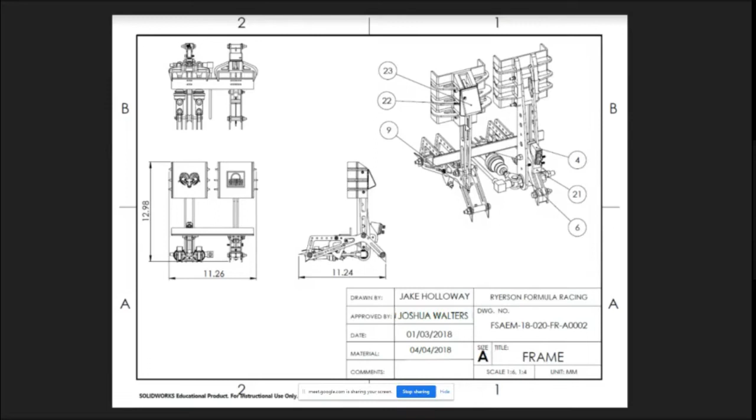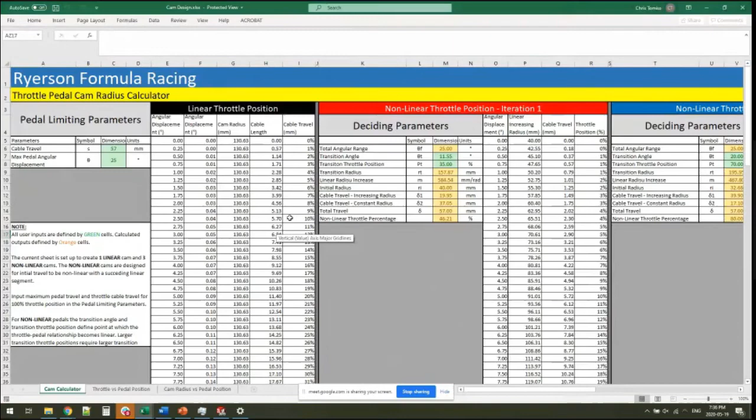Now, Josh, that ingenious man that he is, actually did a really cool cam design doc in Excel, and I've linked this into the support files. He did 3 iterations of linear and non-linear cams that gave different results as well as different throttle resolutions. So we actually have this problem in RF17 through to RF20, that when we press our throttle pedal, it feels like an on-off switch.

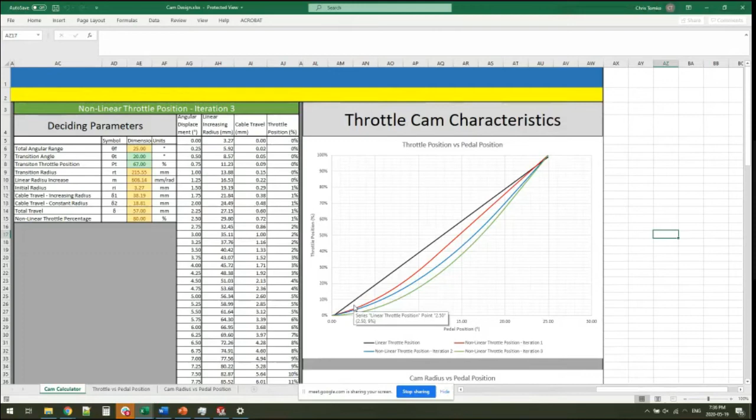If everyone can see, this top black line is a linear throttle, meaning for every degree of pedal position, it increases by a linearly proportional amount in throttle percentage, as you can see on the left-hand side right here.

Now, they wanted to give a higher resolution to lower throttle positions, meaning they wanted to be able to press the throttle pedal more and get less punchiness in lower throttle positions, so that they could easily feather the throttle mid-corner or in a load-sensitive scenario. So they made 3 iterations of non-linear throttle position cams.

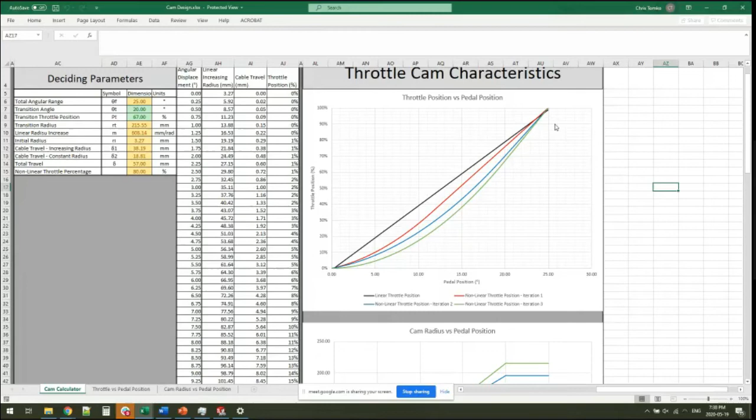So they identified that using dyno curves and logs within our MegaSquirt ECU, and they said, okay, well, that part they could just make it wide open so that it just opens the throttle from 80% to 100% almost instantaneously, but gives more resolution to the lower 0 to 30% of the TPS that's very sensitive, and that would allow our driver to more accurately and more finely operate the vehicle's throttle at lower TPS.

Okay, cam radius versus pedal position. Yeah, I'm gonna keep going, not through this doc, but through another doc, so that you guys can keep with me. So this is the cam design doc. It's linked in the support files. Support files are in the year two, week two, system theory, and right under this design folder is controls and support files.

In support files, you'll see there's a bunch of documents here. Jake, Jack, Jason, and Jake, the capstone that we went through, the pneumatic testing rig that I'm going to go through right now, the shifting presentation I gave back in RF18 to dictate how that system worked, cam design, as well as my controls binder.

Cool. I have probably about 15 minutes, and then we're gonna save some time for some questions, and then we're gonna move on. I went through steering wheel. I'm gonna let you guys go through the JJJZ final report and the shifting presentation. Cool. So the shifting basically works. I won't give you the full presentation.

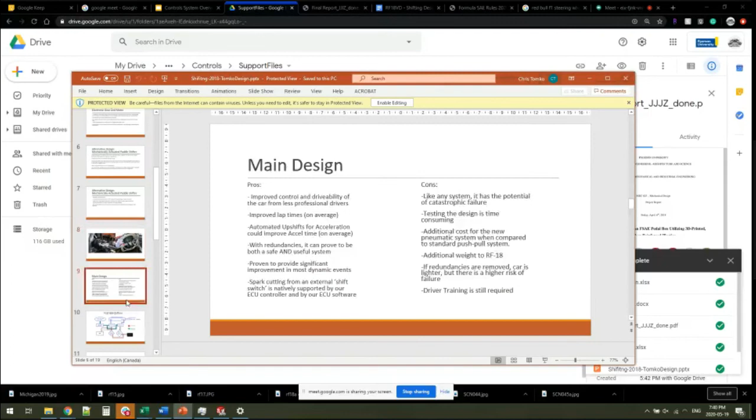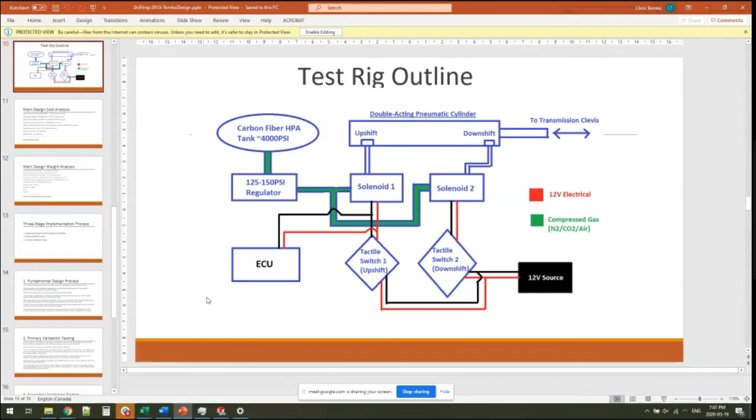Works like this. So you take the potential energy from a carbon fiber high pressurized air tank. Anything above 2000 psi is considered HPA, or high pressurized air, down regulated to 125 to 150 psi, and then fed to two pneumatic solenoids. As you can see here, those pneumatic solenoids look like two little air valves powered by 12-volt signals. Now, 12-volt source with a tactile switch. This side of the diagram right here is actually controlled with an Arduino that was kindly developed and manufactured by our electrical team and lead.

So when we did this in RF18, we bolted it to an old engine, and we ran a test rig that was exactly this, a pneumatic cylinder that if you fed air to one side of this pneumatic cylinder, it would push this rod to the right. And if you fed air, giving 12 volts to this solenoid and feeding air to this side of the cylinder, it would pull this cylinder. Now, this cylinder was actually connected via rod end to the engine shift clevis, as shown in the pictures in the RF18 testing. Now, the cool part about this was that you could electrically control these pneumatic valves.

All you'd have to do is make sure all your lines didn't leak, your tank had the correct pressure, and your regulator was putting out the correct working pressure to get the right amount of force through this shifter pneumatic cylinder to actually shift the clevis. Easier said than done, because everything leaks and everything has noise electrically, or did. But given our persistence, we actually found out a way to make this work, and it worked phenomenally. And it worked phenomenally for a final drive that yielded a top speed less than 140 kilometers per hour.

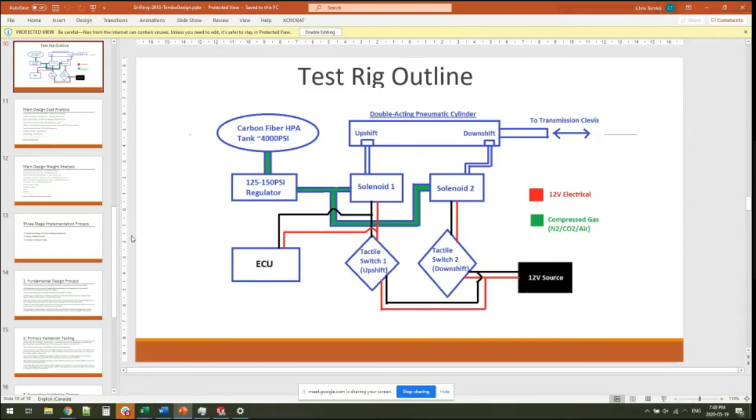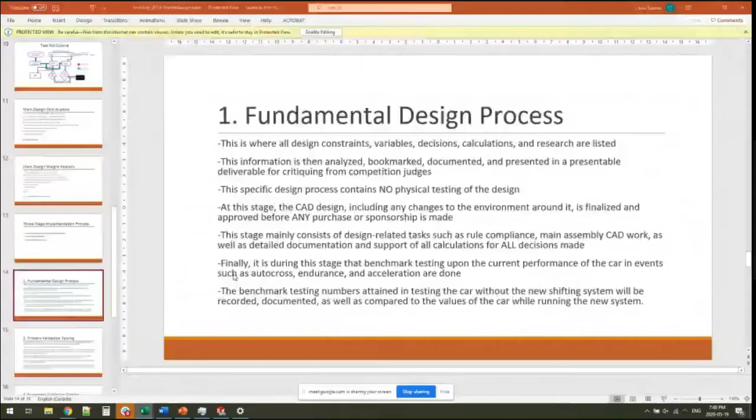It does do a fundamental design process where first off, you put it all in CAD. You figure out your variables, such as your tank calculations. So I want this system to be able to be filled at endurance, or filled right before endurance, and still pass with an acceptable factor of safety. Meaning, let's say we took this car to competition, we did the first 3 events, and now we've depleted our nitrogen tank, or our high pressurized air tank.

I actually designed that filling rig to be filled from a T-tank in the trailer, such that it could be filled to, top line here, 2200 psi or 2150 psi, and it still would have an endurance factor of safety of 2.14 based upon the amount of shifts it would take. And that was done by volumetric calculation of the lines.

It's just like PV=nRT stuff that you've learned in thermodynamics, minus temperature, because it's not CO2. CO2 is very sensitive to temperature and not nitrogen. And it was really cool because it was a real life scenario for using PV=nRT, which I still to this day have never used other than in this one design application.

It was a way of applying stuff that you've learned in lecture to estimate how many shifts you'd get out of a specified pressure and volume tank, transferring that volume to a smaller volume, i.e. your lines and your shift cylinders, at a lower working pressure, and how many shifts you would get in charging and discharging those lines in that cylinder, and expecting your performance for such. And that was actually the theoretical calculation. And we went into the practical.

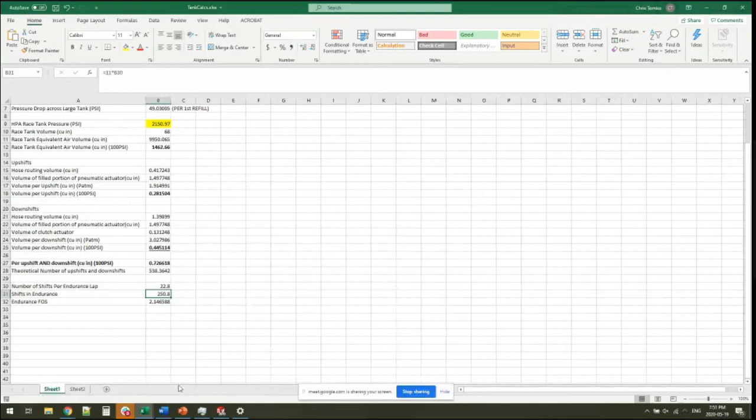And you could actually find how many shifts you would get from tanks of certain pressures or tanks of certain volumes at certain pressures. For example, a T tank normally comes at 2000 psi, right? And we bought a specially ordered 4500 psi high pressurized T tank to recharge our shift tanks that we would just equalize at the end of every day and recharge our paintball tanks to get them above that 3000 psi tank that we could get them filled up at the paintball shop for.

And it was really cool because it could show us how many shifts we would get at certain tank pressures, or how many shifts we would get at certain tank volumes. And it wasn't linear. It was not what we had calculated. It was actually significantly less. I think it was like 75% less. And we accounted that for maybe leakage or bad seals within the system. But these things, if they weren't tested, it would have been a downfall of the system.

Hence, one of the things that is pointed out in this PowerPoint that I showed you was people who don't have redundancies within that system. So we had in RF18 and 19 a manual shifter as well as a pneumatic shifter. So the pneumatic shifter was always actuated via paddles on the back of the wheel, but it was also solidly connected to the shifter. So every time you shifted, the shifter within the cockpit would move next to your leg.

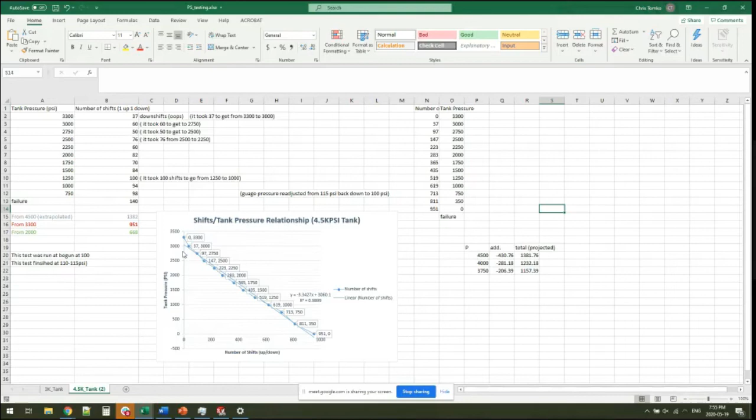And sometimes a tach LED is very useful to see while you're driving. So I thought, point it directly at the driver's face so it's the brightest for him. It's not going to blind him. It's just pointed directly at him for usability purposes.

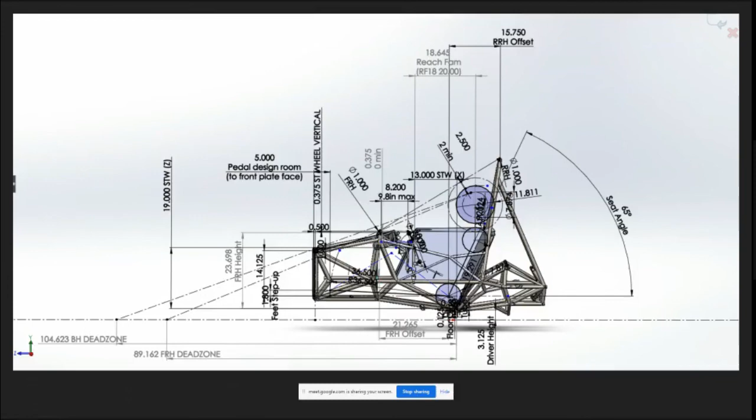All right, I've taken up 2 hours. I think I've debriefed pretty much all of what controls is and what controls does.